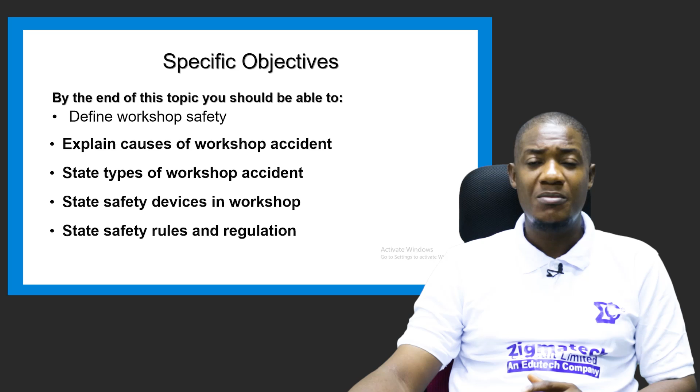So let's go straight to what we have. By the end of this topic, you should be able to define workshop safety, explain causes of workshop accidents, state types of workshop accidents. You should be able to state safety devices in the workshop and state the regulations, the rules in the workshop while you are working, and make them your watchword.

A workshop is any building principally used for making or repairing objects. Any building used for fabrication or repairs is called a workshop. So while you work in the workshop as a technologist, there are measures that you have to put in place, that you have to imbibe, so that accidents will be prevented, reduced, or avoided totally while you're in the workshop.

So what is workshop safety? What exactly is workshop safety? Workshop safety is freedom from harm or danger or accident while you're in the workshop. So that states that when you are working in the workshop, no accident, no harm, no danger. You are not exposed to any danger. That is workshop safety.

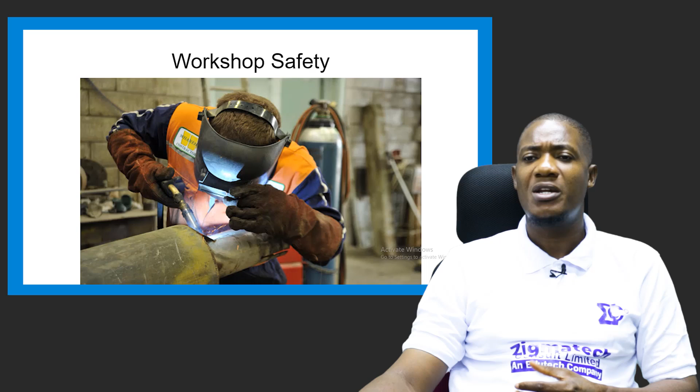If you are not safe, you can't produce anything in the workshop. So there are a few examples of safety devices that we have. Of course, this is the normal coverall, this is a boot, this is a helmet, this is a glass, a goggle that he has on. The eye shield is actually a little bit different from the goggle.

So we have the helmet. Every engineer, every technologist should have his helmet on. Basically, what the helmet does is to protect the head. In case anything falls from above, anything falls on the engineer or the technologist, his head will be protected.

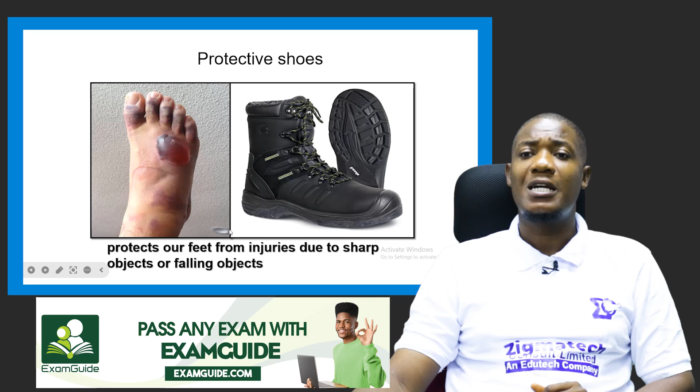Now the safety boot, the protective boot. No matter how you have mastered your work in the workshop, these are things you must do always. She was not thinking of this, but you can see it. If you had this boot on, this injury would have been avoided.

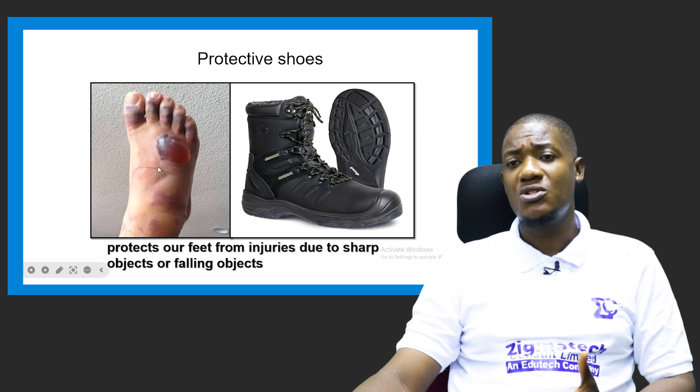Then the hand gloves. While you are working in the workshop, put your hand gloves on. It will prevent direct contact with your skin. Anything you are doing in the workshop, handling hammers, handling drills, and so on and so forth, it will prevent that direct contact with your palm.

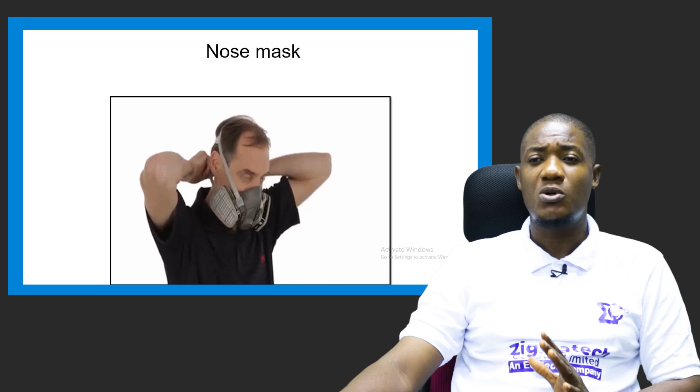The nose mask, in the event you are handling chemicals or what you are doing in the workshop produces fumes or dust, you have to protect your respiratory system from all those things getting in. Imagine if you are welding or making use of flux. There are some oxides that will be emitted that, when they get to your system, will affect you. So you need your nose mask when you are working in the workshop. They are very, very important.

Then the ear muffs. Imagine somebody using a power saw, or some machines in the workshop produce noise that won't even allow you to hear what the second person is saying. Or even if there's an emergency in the workshop, you won't be able to hear it because the noise is much. When you keep hearing sounds above what your ear can tolerate, it affects your hearing ability, it can deafen your ear. So when you are in the workshop, it's important you wear your ear muffs to reduce the intensity and loudness of the sound coming into your ear.

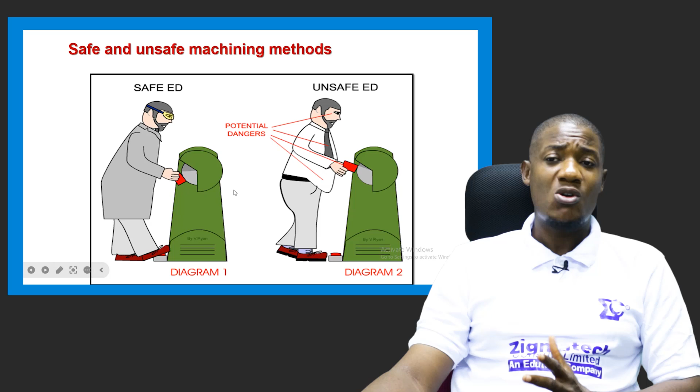So you see this one, well equipped, wearing safety gears, his nose mask, you can see his eye shield, his helmet, the safety boots, all in the right place it's supposed to be. So even this cutter here will not have anything to do with him, because he's doing the right thing at this point.

Now, complete personal protective equipment is what we'll see whenever you are in the workshop. This is what the safety officers should ensure, that you wear your complete PPE. It's for your safety. No matter the inconvenience, wear it.

What are the safety rules and regulations that you must adhere to strictly while you are working in the workshop? Number one is that...

You don't operate any machine that you don't know anything about. I know that at your level of education, you're so inquisitive, you want to find out what is happening, what this machine is for. Please don't. Some of them, you don't know which button to press, meaning you've started the machine without knowing anything about it. Don't operate it unless you have your instructor there to say, do this, operate like this, do this, remove this, add this. Then you can go and operate under supervision.

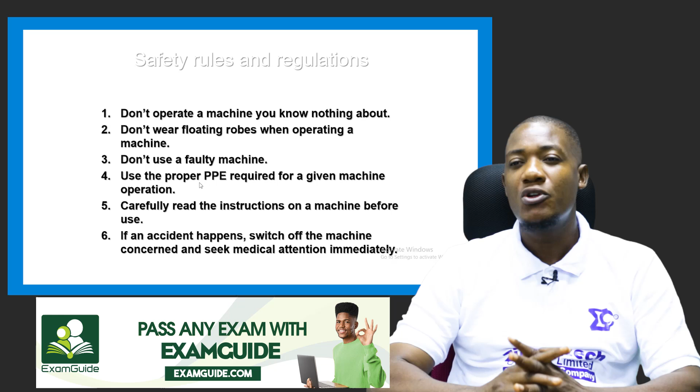While you're in the workshop, don't wear floating robes and operate machines, especially machines that are movable. Don't use floating wares, they may end up getting entangled, and when that happens, you will be the one to suffer in the workshop. It will be a kind of emergency in the workshop.

So while in the workshop, don't use a faulty machine. If the machine is faulty, please report to the instructor, report to the technologist in charge of the workshop. Don't use a faulty machine, don't manage it, don't manage it, because this time now you need the right machine to do the right job.

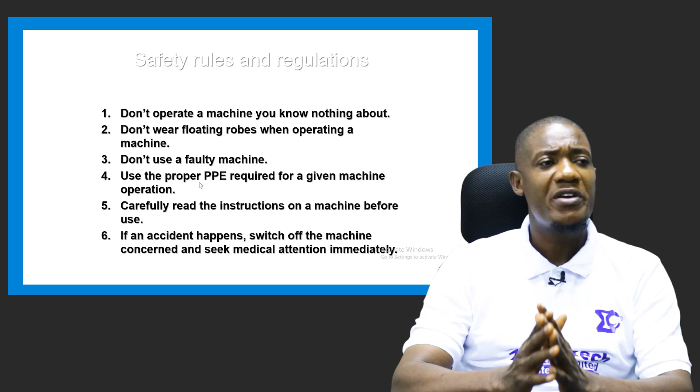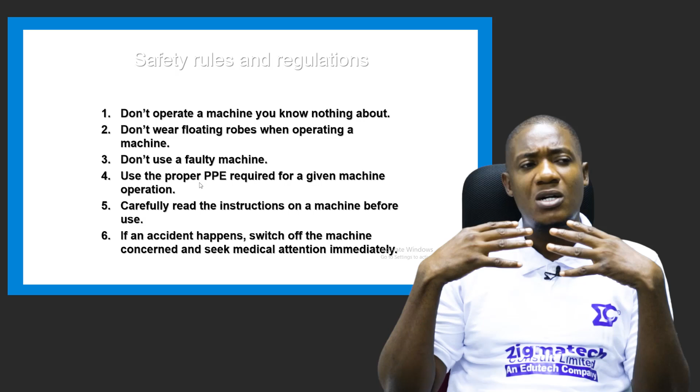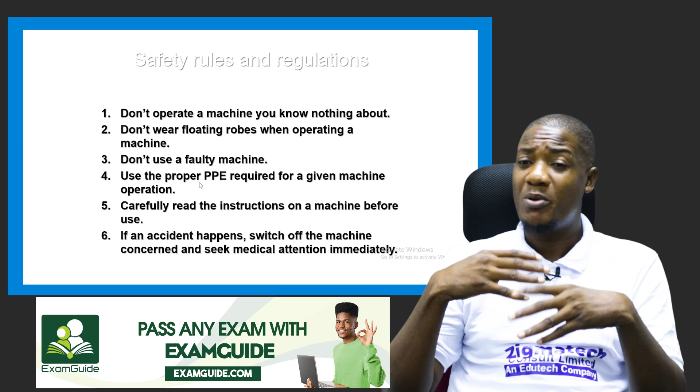Then use your proper personal protective equipment needed for the operation of any machine. Different machines require different PPEs. Depending on the machine you are operating in the workshop, please use the right or proper personal protective equipment for the machine. Then, before you operate any machine, it's important you read the manual and carefully follow the instructions about how the machine is operated before you operate it. It's important you do that in any workshop you want to work on.

Now, in the event an accident happens, please switch off the machine and seek medical attention immediately. Don't try to hide it. Seek medical attention, it's important.

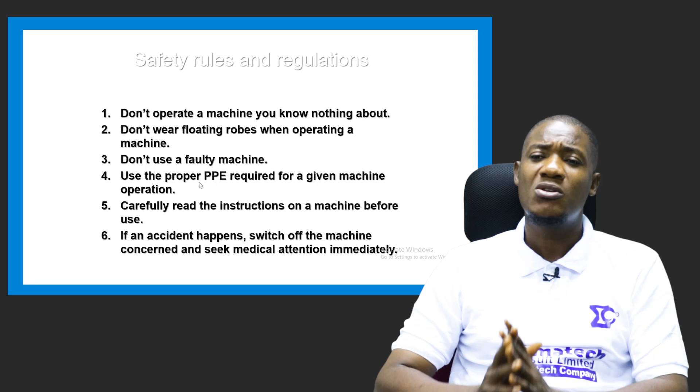If these regulations and safety rules are taken into consideration, we can minimize accidents in the workshop. Although we may not totally eradicate or remove accidents from happening, if you obey these rules I've mentioned earlier, we will minimize it from happening.

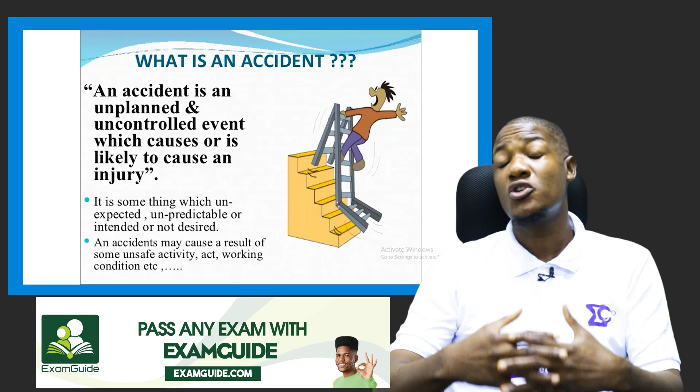So we want to talk about now what an accident is. What exactly is an accident? Can they happen in the workshop? Yes, they can happen in the workshop. An accident is an unplanned and uncontrolled event which causes or is likely to cause an injury. An accident is not premeditated, not predicted.

It's not intended. It's not a desired occurrence. It happens when you are not planning it, when you are not expecting it to happen. So that is why you must take some measures to ensure they don't happen.

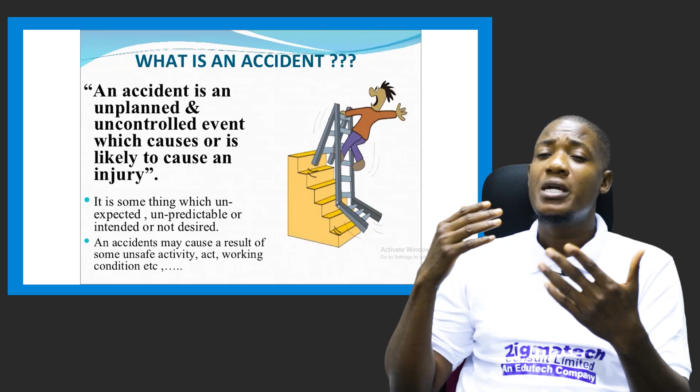So accidents can happen because of certain reasons. It can be because of unsafe environment, some bad working conditions, some unsafe activities in the workshop, or some acts in the workshop. So there are different reasons why accidents happen in the workshop.

Accidents can happen in the workshop for lack of provision of safety devices. When what you are supposed to wear to prevent accidents, your safety gears, are not provided in the workshop, accidents may happen. When you don't have your helmet on, your face shield, and you are walking in a place with scraped wood, specks can enter your eyes. So lack of provision of safety devices can cause accidents in the workshop.

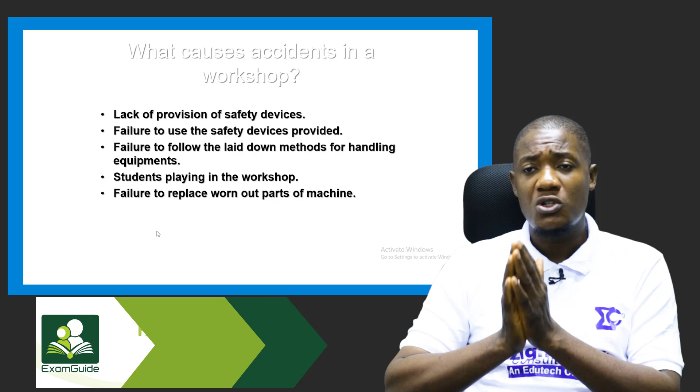Then when provided, some people will not want to use them. So failure to use the safety devices provided can also cause accidents in the workshop. Failure to follow the laid down procedures and laid down methods of handling equipment can cause accidents in the workshop.

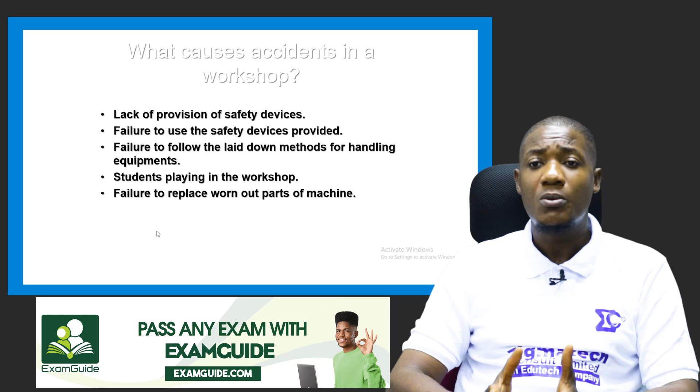Fatigue, when you are very, very tired in the workshop and you can't concentrate, it can lead to accidents in the workshop.

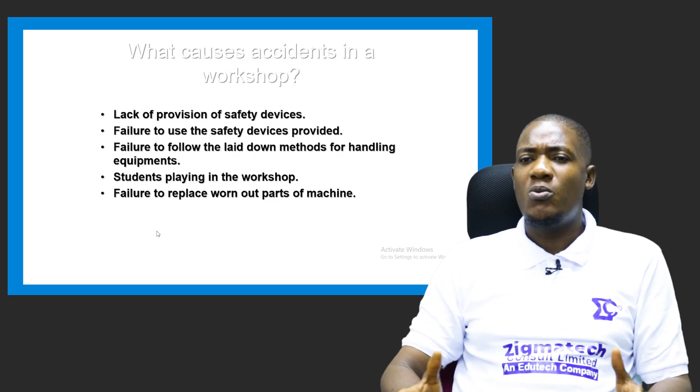When machines are bad, failure to replace worn out parts of the machine can lead to accidents. And some students like to play a lot in the workshop. When they're in the workshop, that's the time they want to play. So playing in the workshop can also cause accidents.

So these are different causes of accident. Please take note of them. It's important you take note of them and hold them.

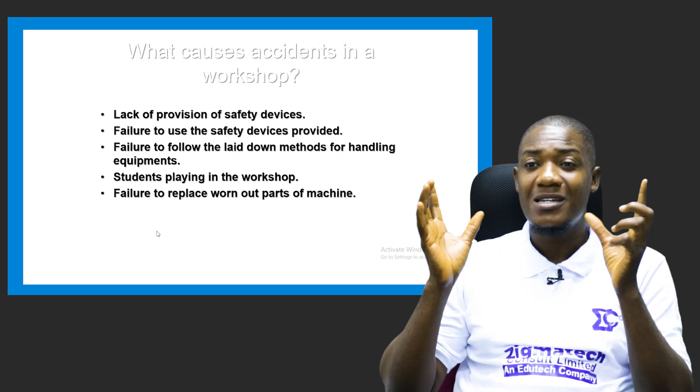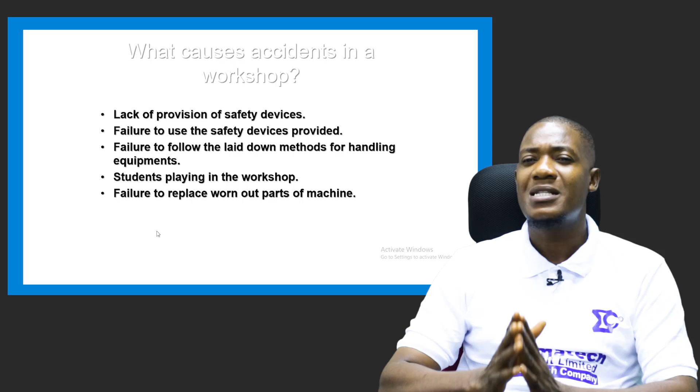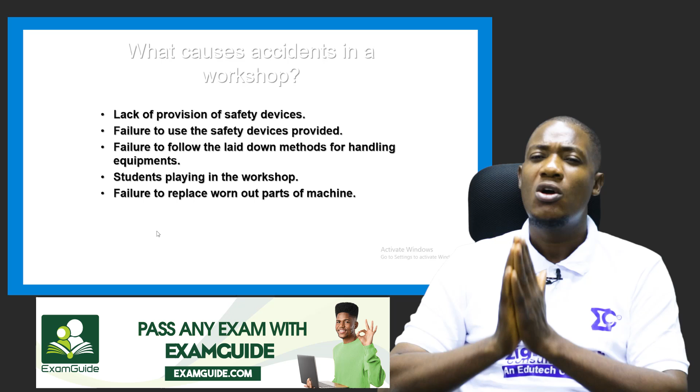We've said that fatigue can cause accidents. Very, very important. When you are working in the workshop and you are tired, please stop work. If you don't stop, you might end up getting involved in an accident. And you must also concentrate. Distractions - you must avoid being distracted whenever you are working in the workshop.

What are different types of accidents that we have in the workshop? We have falls. Some people can fall in the workshop. It can be as a result of slippery floor, spilled chemical on the floor, or getting entangled with cables on the floor, or different levels.

Electricity, bad installations can cause accidents. There are different types of accidents that we have. Contact - when you have contact with chemicals, contact with electricity, contact with hot or very cold radiations. These are different types of accident that we have.